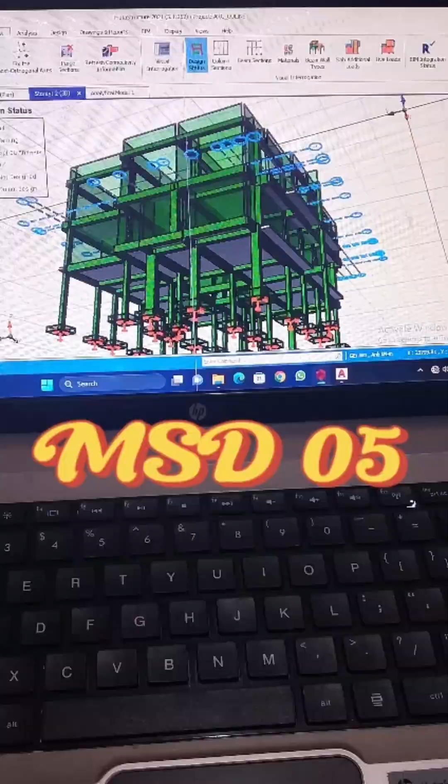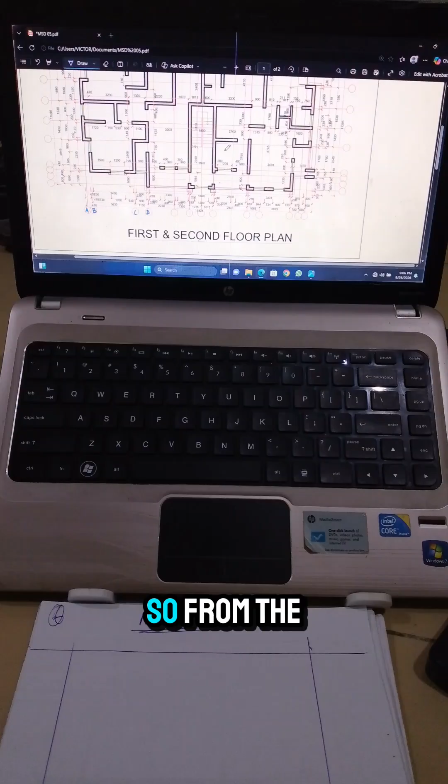Hello, in today's structural design, we'll be starting with beam designs. So we have this architectural plan that we are working with. So from the ground floor plan, first and second floor plan. So we'll start with the first and second floor plan from the second floor. So we're going to load this building from the roof down to the foundation. But today we are starting with beam design.

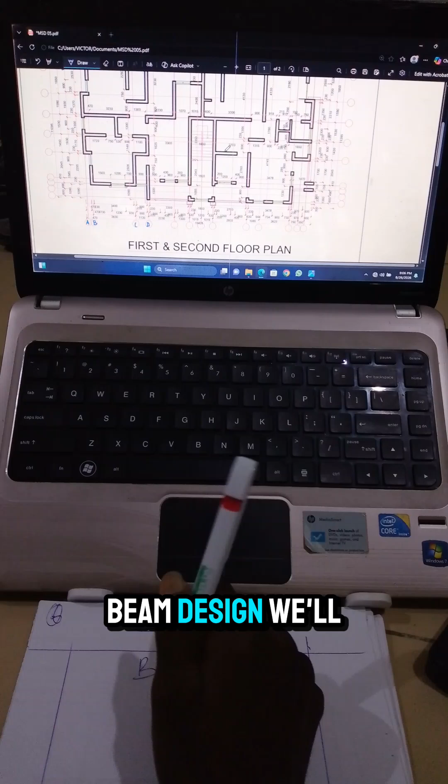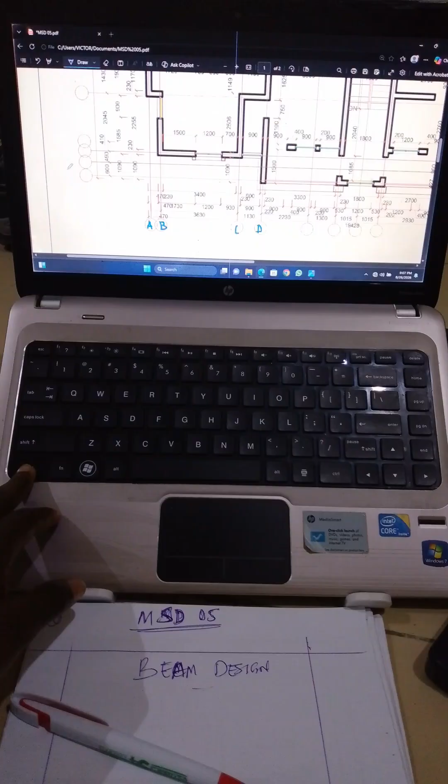Beam design, right? Then for our beam design, we'll be loading this building from roof down to foundation. So if you have this architectural plan, you see that the axis lines are not labeled. So I want you to label them. For vertical, it should go 1, 2, 3, 4. That way, you should just name the label.

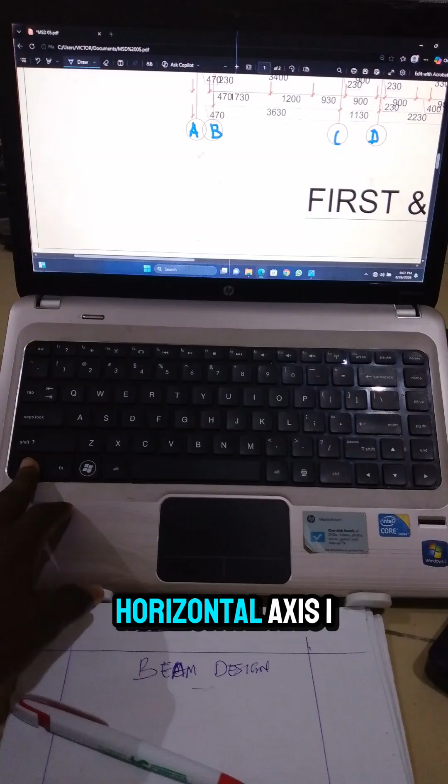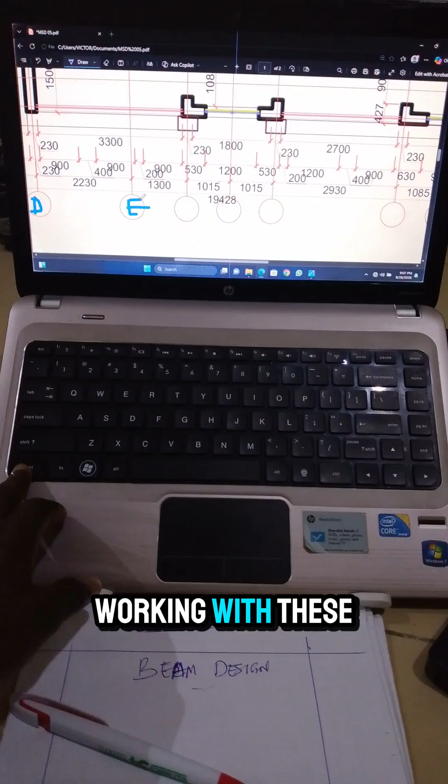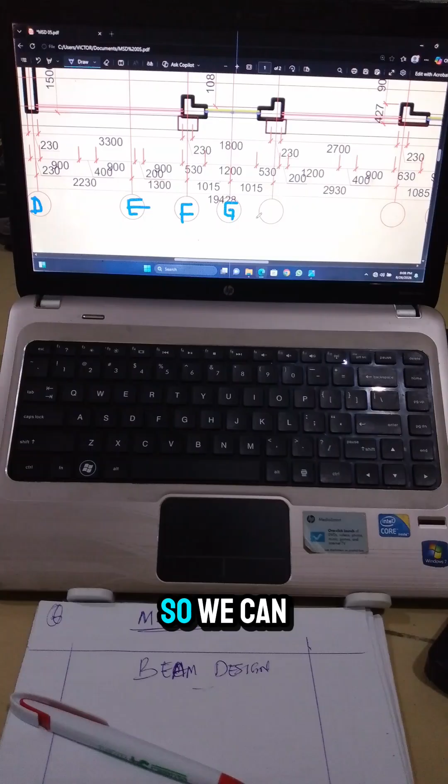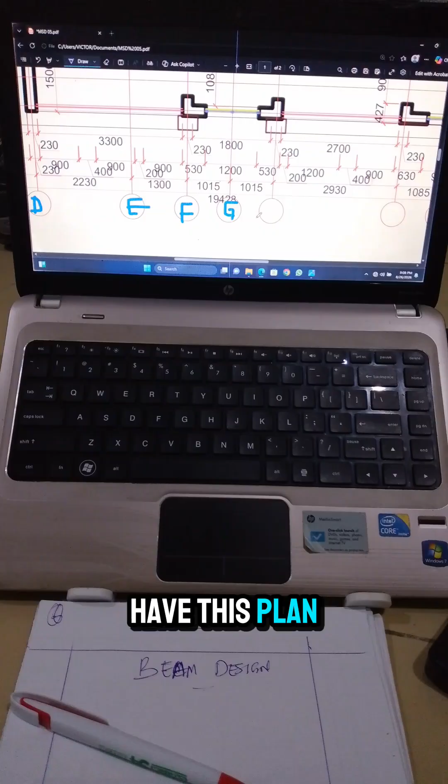Then for your horizontal axis, I want you to label them A, B, C, D, continue. Right. A, B, C, D, E, F, continue that way. Because we are going to be working with these labels. So I want you to print out this architectural plan and label it on paper. So we can easily be picking panels and be designing our beams and all our structure members. So do that. If you don't have this plan, you could get across to me and I'll send it to you. Alright.

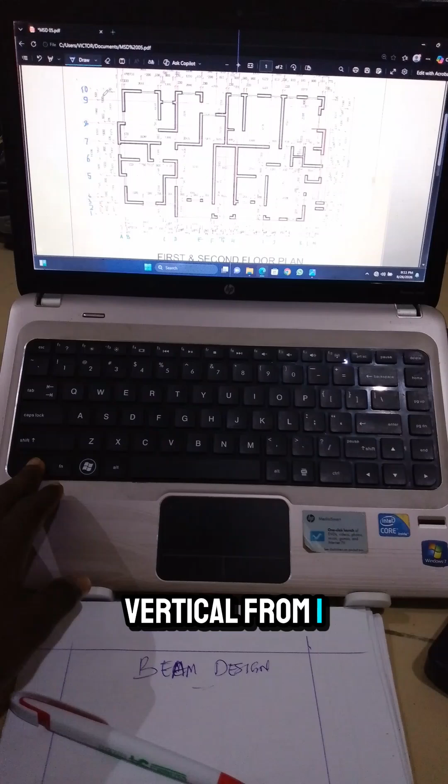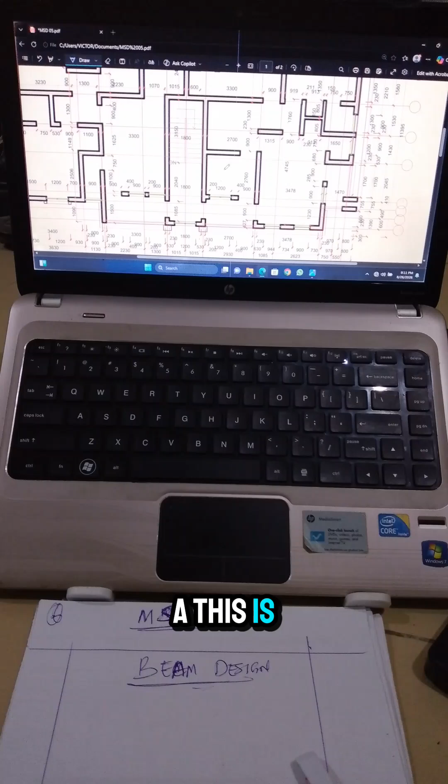So if you have done that, you get your alphabetical horizontal from A to M and your vertical from 1 to 10. So if you've done this now, then we can now start with our design starting from the roof. So we'll be picking this row of beams. We'll be picking here as a panel. We'll be picking here, this as a panel, this as the whole. Then this axis and this.

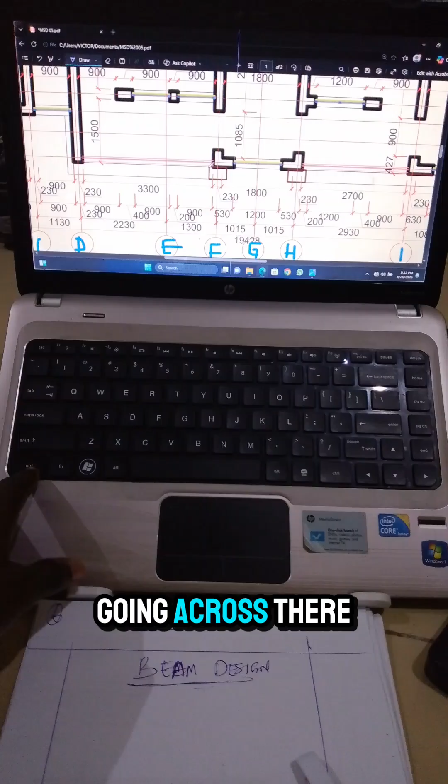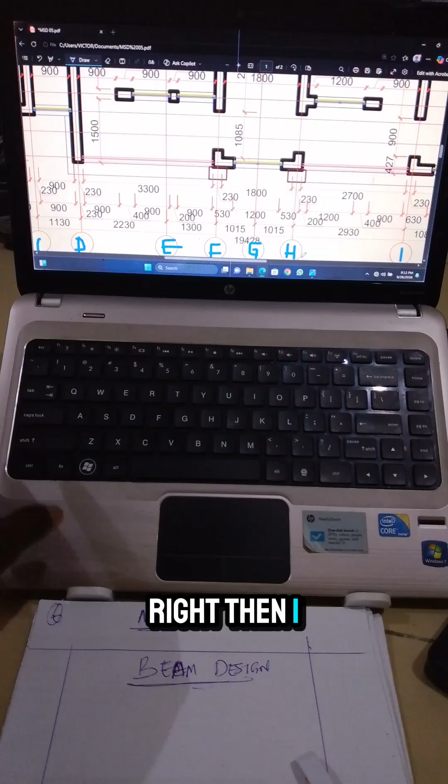So we'll be having beam D1 to F1. This D1 to F1. A beam is going across there. And second beam will be F1 to H1. Right? I'll sketch this out and we'll start our design. Okay, so we are going to work with these dimensions you are seeing and with this drawing. So in your writing material, I want you to have this place as your reference, this your calculations, and here should be your output.

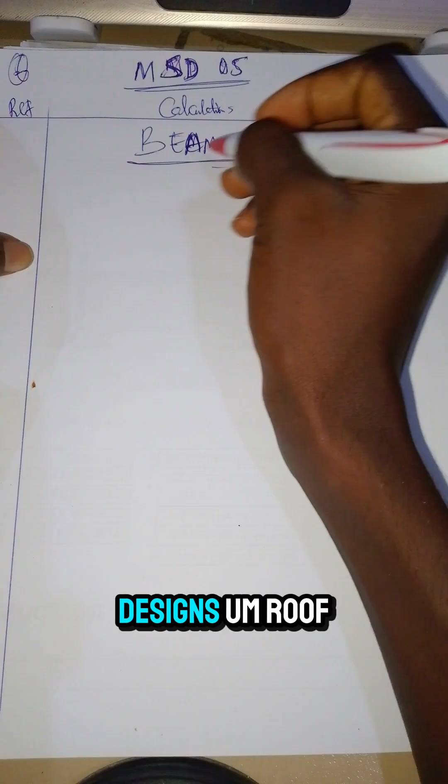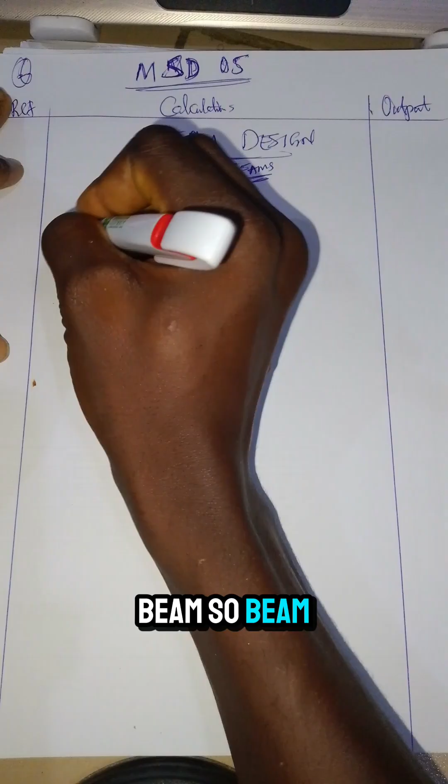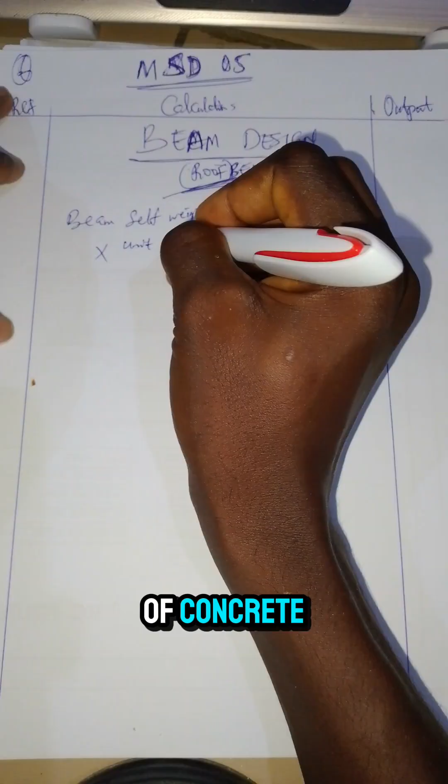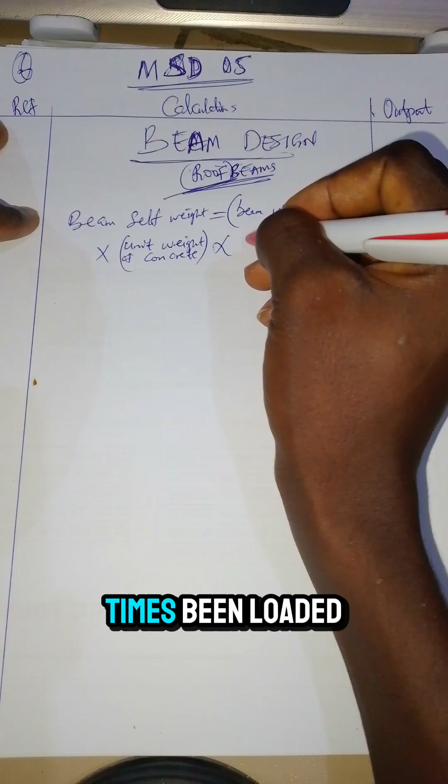So we are starting with roof beam designs, roof beams. So first we're going to get the self weight of our roof beam. So beam self weight is equal to the beam width times the beam depth, all multiplied by the unit weight of concrete times dead load factor.

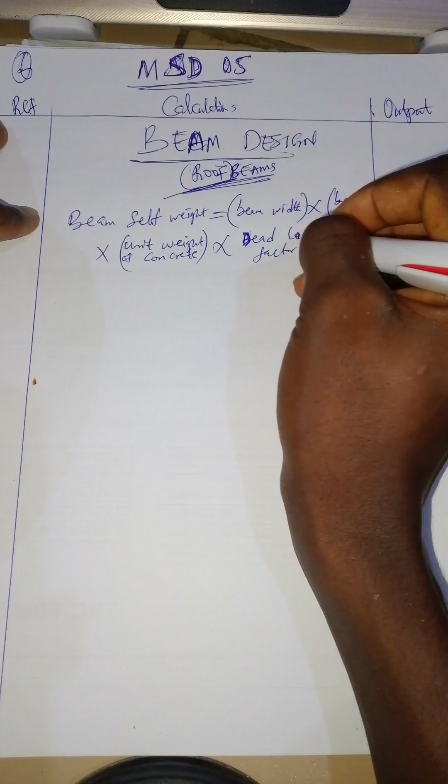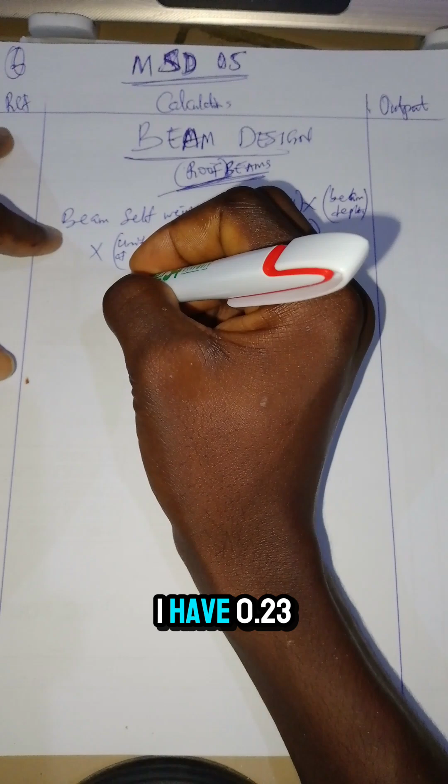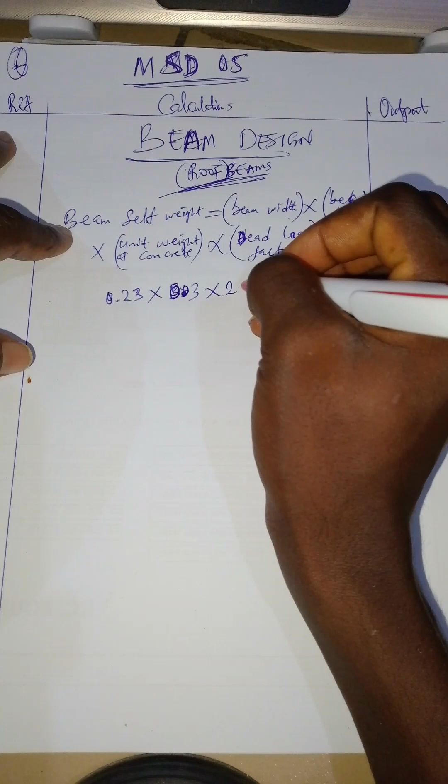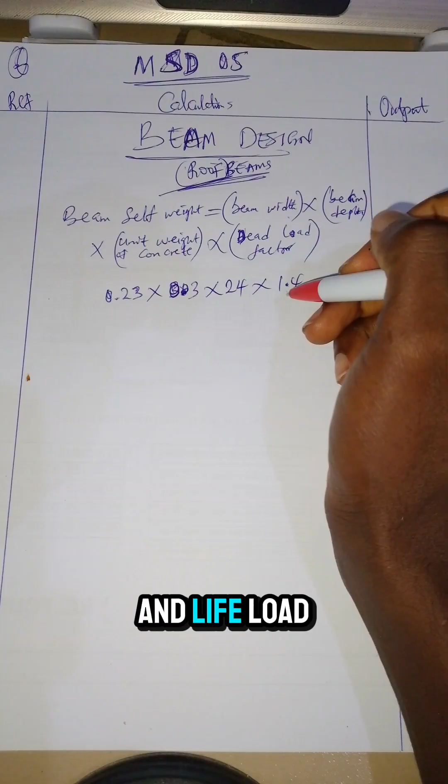So your beam self weight is your beam width. For the beam width of our design, we'll go with 230. That is 0.23, as the beam width, times the beam depth 300 for roof beam. So the minimum depth for a roof beam is 300. So that would be 0.3 because we're working in meters. 0.3 times unit weight of concrete, which is 24 kilonewton per meter cube. Then times the dead load factor 1.4. I told you that the dead load factor is 1.4 and live load factor is 1.6.

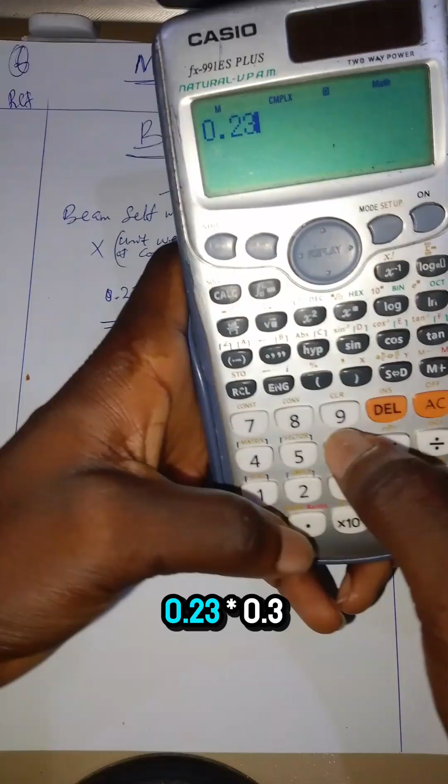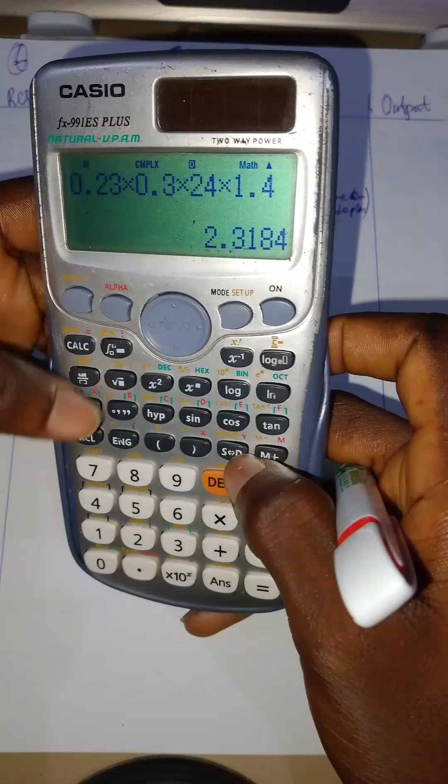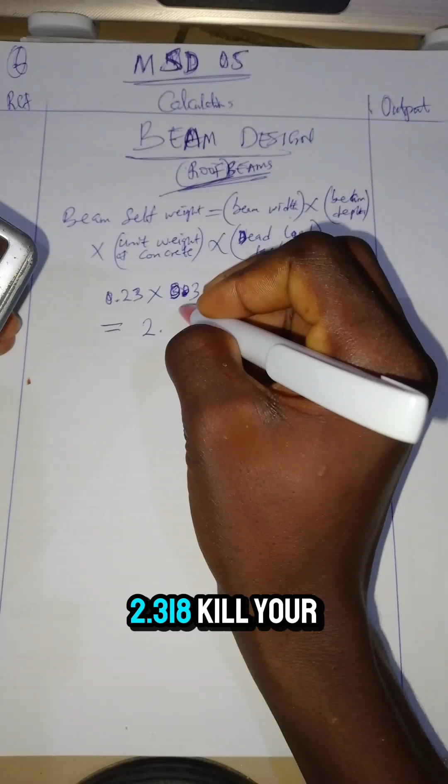So we multiply this: 0.23 times 0.3 times 24 times 1.4. So you have 2.318. So let's pick 2.318 kilonewton per meter. So this is our roof beam self weight.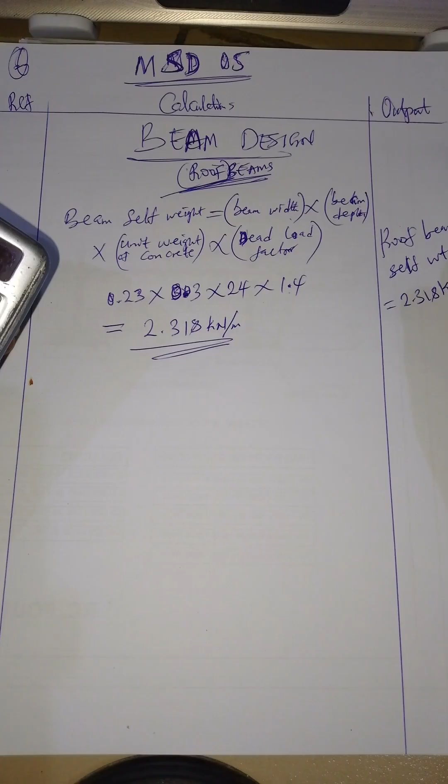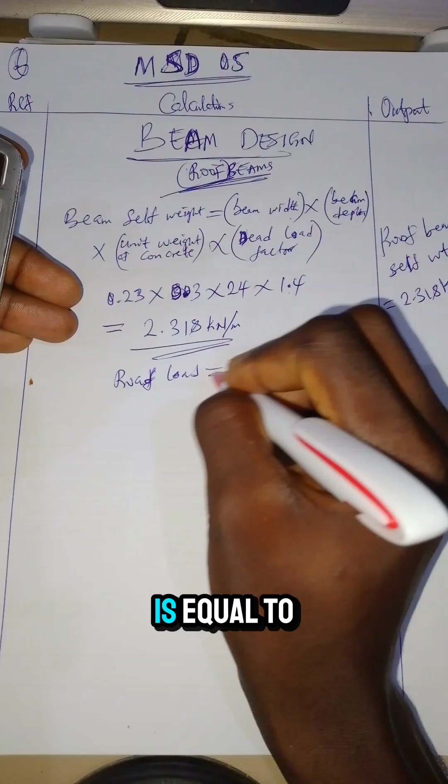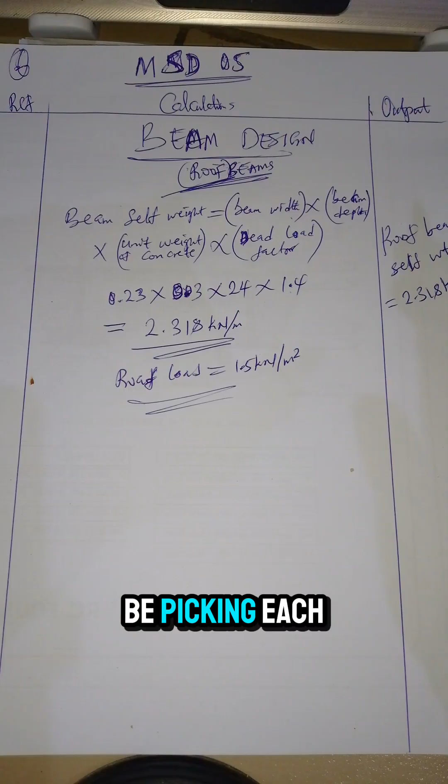Okay, so we'll be working with this, and then our roof load is equal to 1.5 kilonewton per meter squared. This is our roof load. So now we are going to be picking each section of our beams, the panels, and start designing.